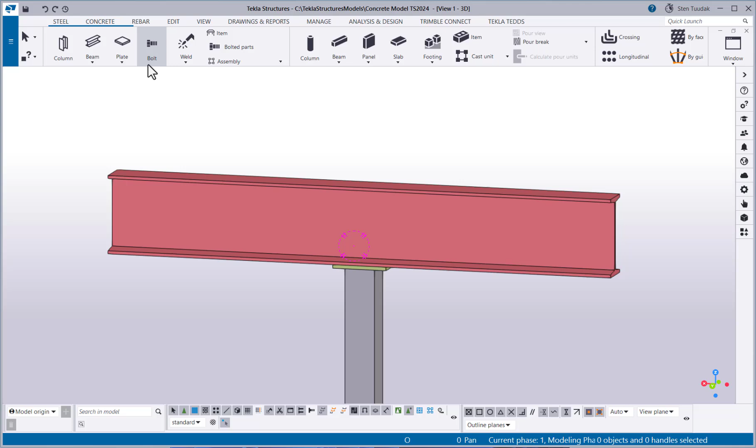One thing that I like about Tekla 2024 is the new way of adding bolts between steel parts. So if we start creating bolts like old ways, hold down the shift key to see the property pane and set the properties right.

Here you can choose the size like always. The array is important and the starting point. These are already correct, but the new thing is this contextual toolbar. What's interesting is these three options that we now have.

The first one is the bolts automatically detect the parts and the direction to be bolted and the faces, so everything is as automatic as possible. I'm glad I was in this testing group, so this is what we tested. By default it's selected, and this is what you normally want to use.

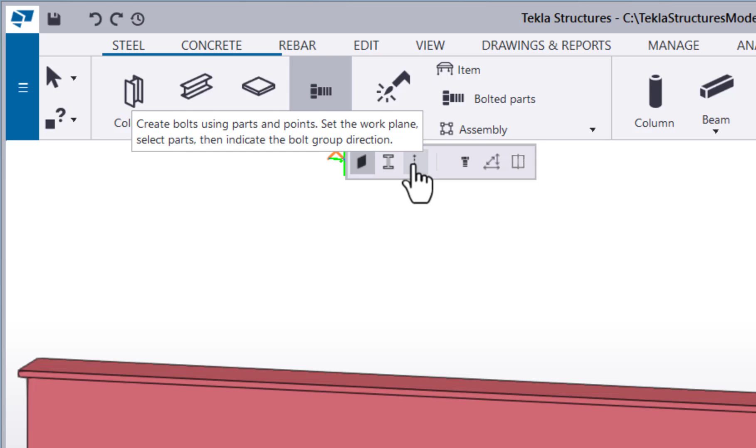The second option is we can select the parts we want to bolt manually, but the faces come automatically. In some cases maybe you want to use this one, and the old one is the third: we select manually the elements we want to bolt together and select the axis. This works right away like old times, but we want to test the new way.

As you can see, we can see the preview, and it automatically selects the middle of the part like we normally do the bolts. In the middle of the part it selects and shows the distances and shows the preview. So I like this very much.

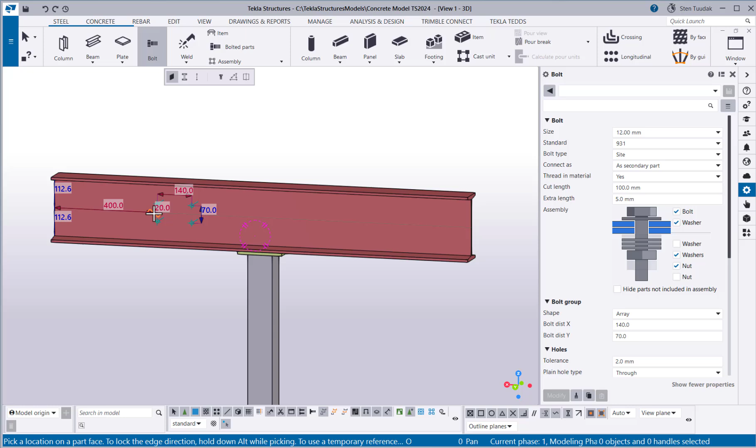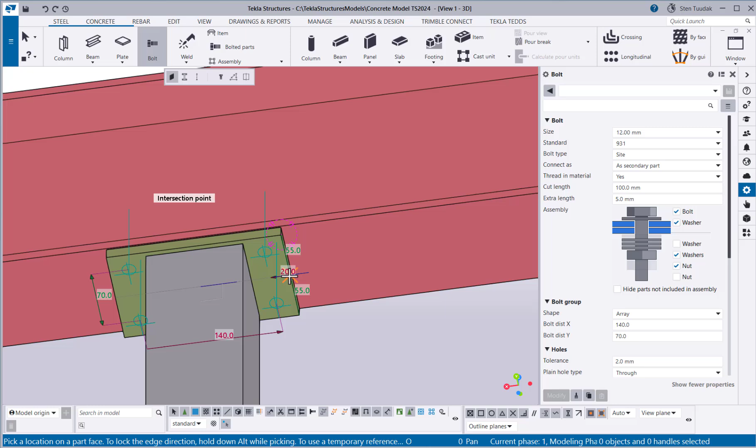For example, we need to do here. Of course you measure the distance of X and Y, and you enter here, and you can see right away the preview, and this preview is shown. It looks nice, and it selects by default the middle of the plate, like we normally do, and we enter the bolts here. So yes, we now have the bolts.

They came automatically nicely. If you want, you can select the bolts and change the numbers if you want, like always. The only way of rotation, for example, if these bolts came automatically wrong and we want the bolts to come from top to bottom with the screws fixing in the bottom.

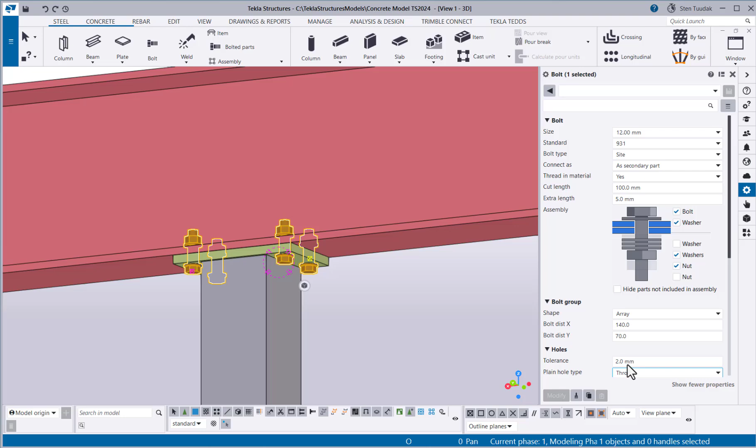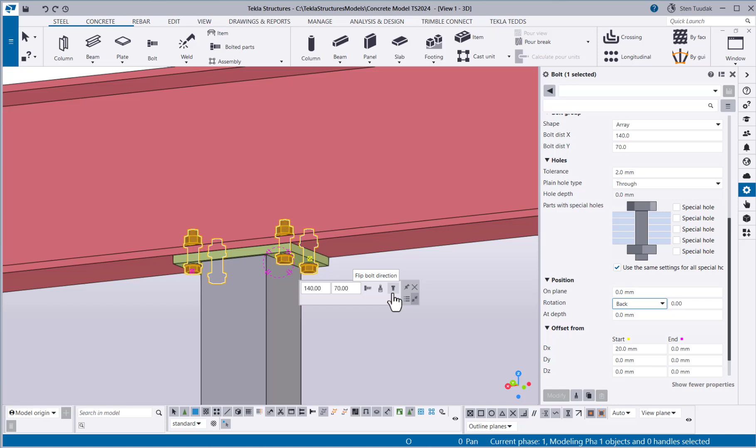In the old times there was some rotation option, back, behind, front, below, something, I never really studied them. I just rotated 180 degrees, but now in this contextual toolbar there is a 'flip bolt direction' button. This is a nice button, so we can easily flip the bolts. So adding bolts, I like it very much, and this is something new that we have now.

One new feature, really the most popular feature in the world in Tekla 2024, is more colors in drawings. First of all, to use more colors in drawings, we need to create more colors, under the file menu.

There's one new editor, and here you can see the color palette editor. So we create a new color, add a new custom color. Let's say this is yellow, very yellow, we know. Name it yellow, okay.

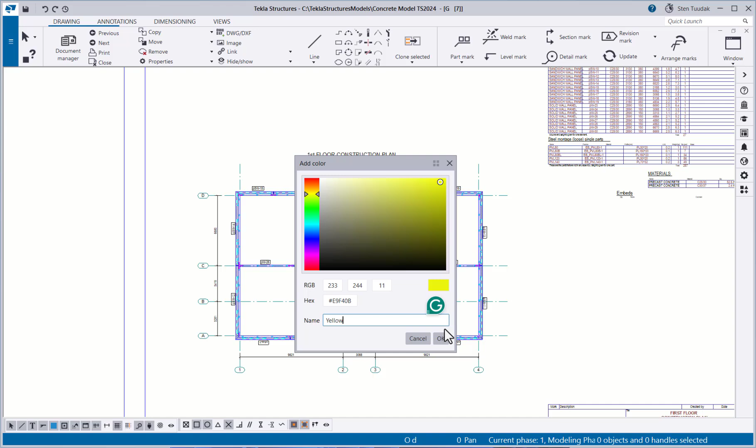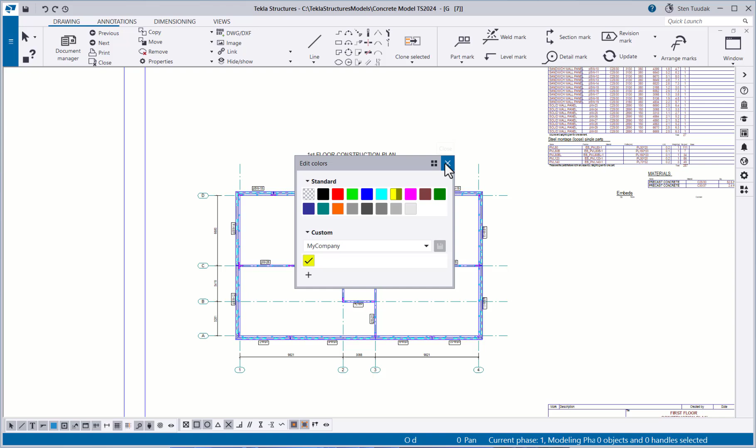And we can see here is yellow, and my company is my company, and let's save this. So yellow color, we can add more new colors, and the file name is my company. So we have created a new color. Let's close it, and see where we want to use this new color.

For example, let's take these stairs. Let's double-click on the stairs, and here you can see the colors: visible, hidden lines, and the reference lines.

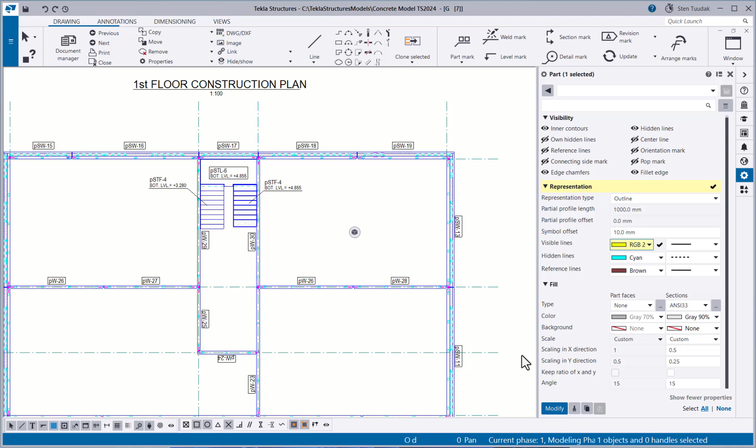We change the visible lines to yellow, and we can see 'my companies' here. You can change the file name to what you want to use, but I use my company and this yellow color right now, and click modify, and we can see that this element really changed to this RGB color. These numbers, every software uses these numbers, this is well-known, and the element went to this color.

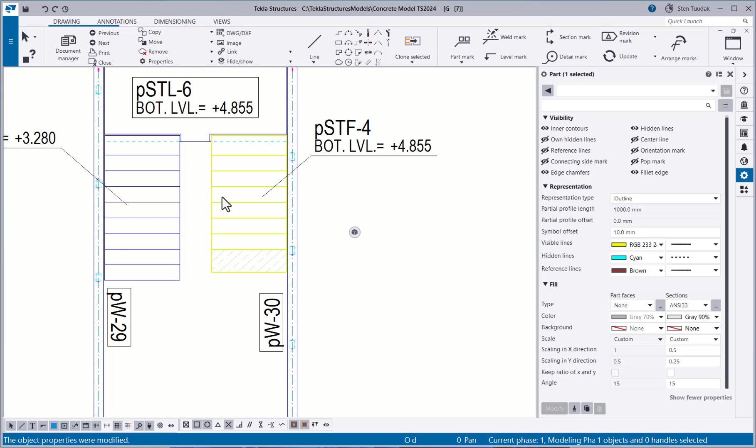And finally, when we want to print out, these settings go to the print drawings too. Let's make it black and white, and I think line properties, and...

So all new colors, I think yes, we can see here RGB yellow color and this line thickness, so we can change the line thickness here, for example 20, and we can save as, and we know that yellow corresponds to this baseline width times thickness number. This thickness is yellow color, and we can print.

So we can have as many different colors as possible in our drawings, and you can use them as you wish. So more new colors in the drawings, here you have it.

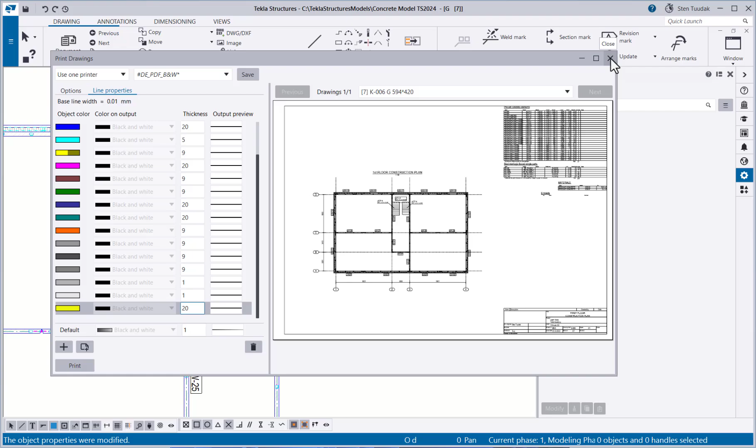In Tekla Structures 2024, I like one more small feature. I don't know how much development they spent on this, but it's very valuable and I like it very much. It's called interactive rotation center.

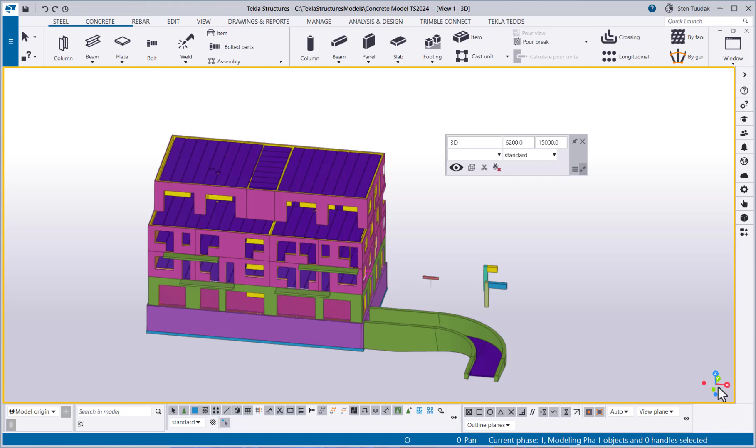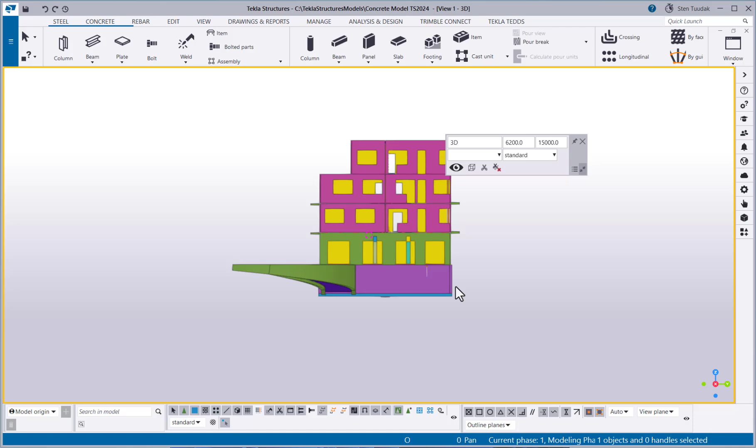In the old times, we had a contextual toolbar where you could choose which side you want to see the model. We still have this feature, but now extra we can see the axis from the bottom right corner, and you can click from here so it goes smoothly. It's very intuitive and I like it very much. I definitely will use this feature, and I recommend testing it out. Put attention here, test it out, and see if you like it and if you are going to use it. I think it's a very good and useful feature.

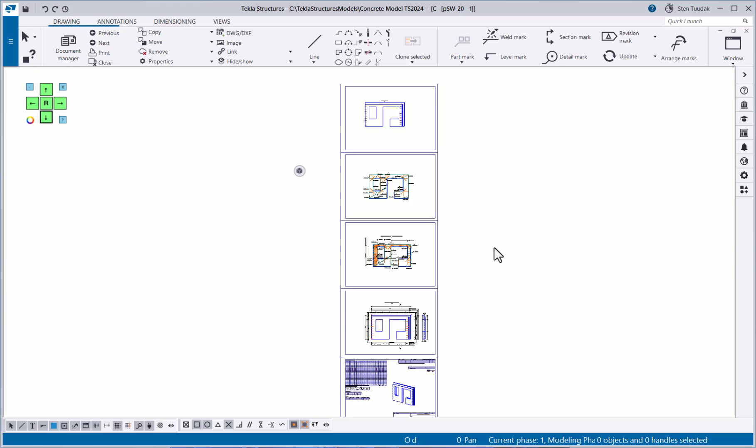One improvement I'd like to bring out, which is a bit more complicated to show and test, is that I believe Tekla or Trimble development has put a lot of effort into having better dimensions. If we create shop drawings automatically, we can have these dimensions automatically, and I like everything that is done automatically. There are some improvements there.

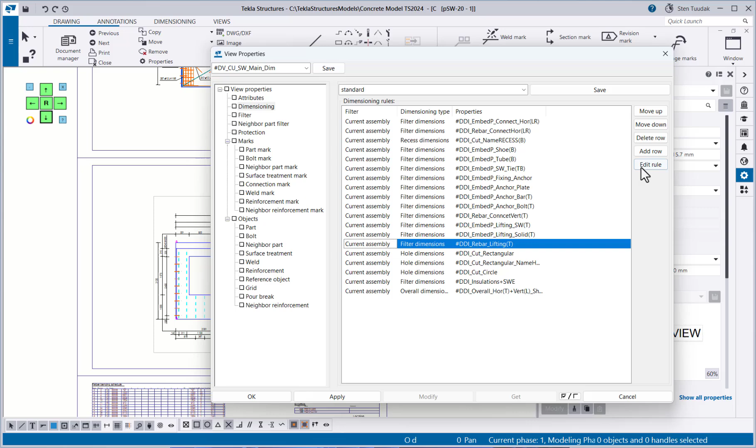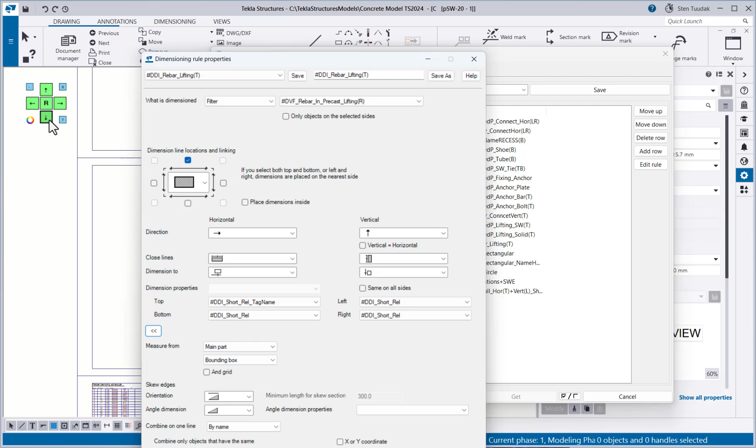For example, if we select this view and dimensions, then filter dimensions, like I use a lot, and edit rule, we can see that the dimensions are coming more nicely. If they don't fit on your screen, you can use the macro that's in Tekla Warehouse. I see many options that maybe you want to use or maybe not, but you have this opportunity.

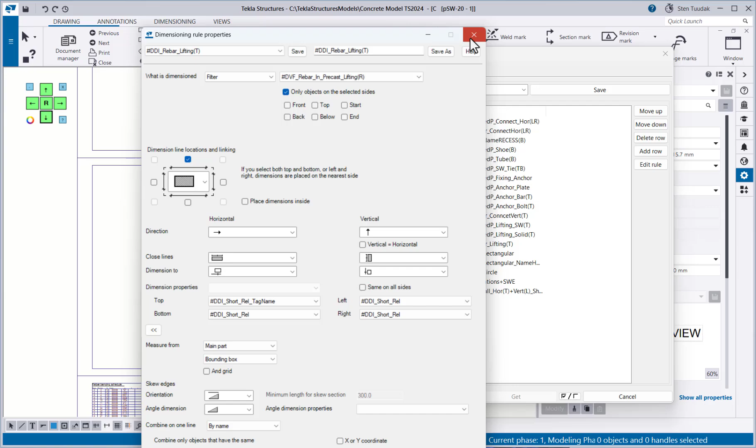But definitely the new one is 'only objects on the selected sides,' so we can turn it on and choose what side or where we want to have these dimensions. So this improvement, hopefully automatic dimensions have been improved.

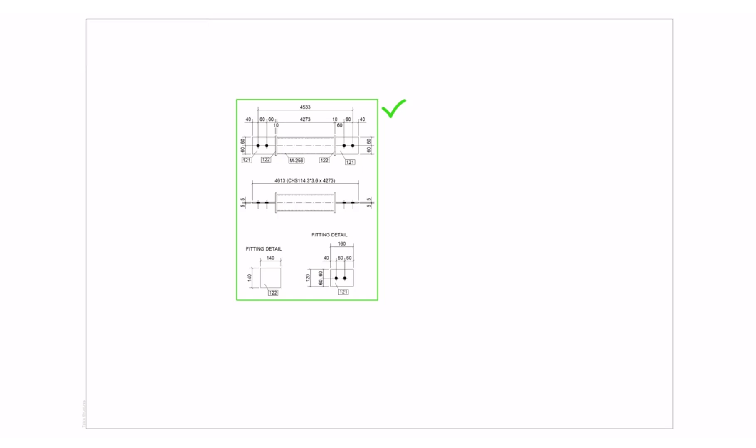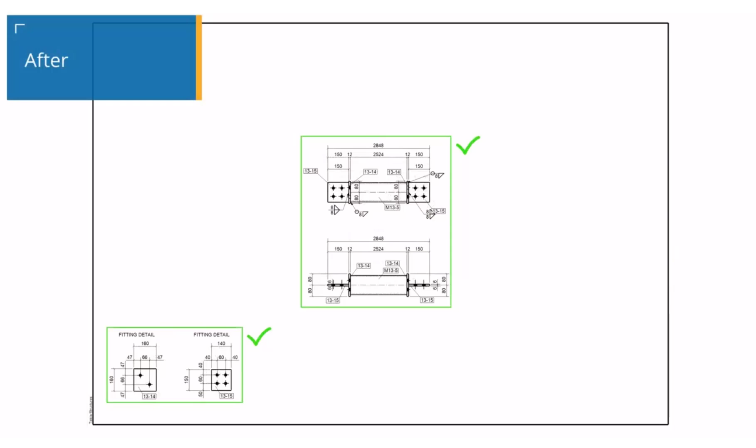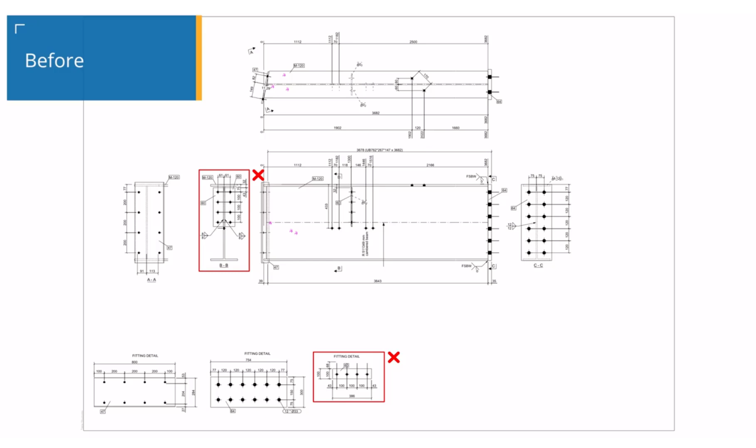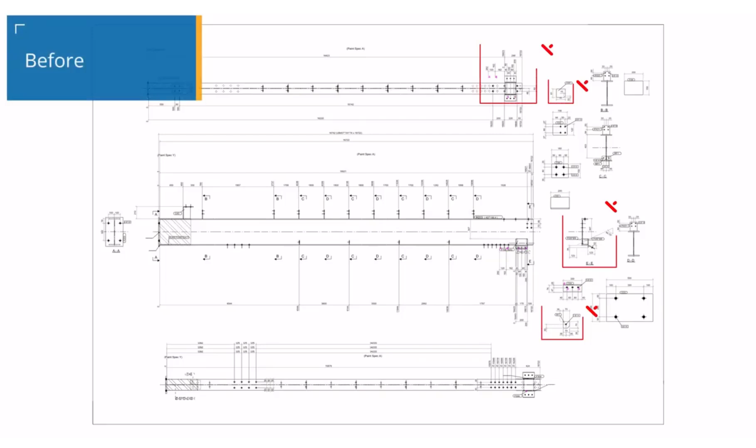The second thing is, as you know, on the first drawings we normally place the dimensions, and at some point when we know two elements are pretty similar, we use cloning in Tekla Structures. Cloning is working better now and has been improved. I'm really happy they've improved the cloning feature, and here we can see some examples of what's been improved. In the old times, cloning sometimes worked better, sometimes worse, but now it's been improved and is much better that we use in every project, or we should use it. That's why I like this improvement and development in Tekla Structures 2024 very much.

The next thing I like in this version is the new improvement, BCF Topics. It's improving collaboration with other software tremendously, especially using these BCF things with IFC files that support collaboration. I need to say that now in this version we have it in Tekla Structures too, but I think we've had it in Trimble Connect already for about a year.

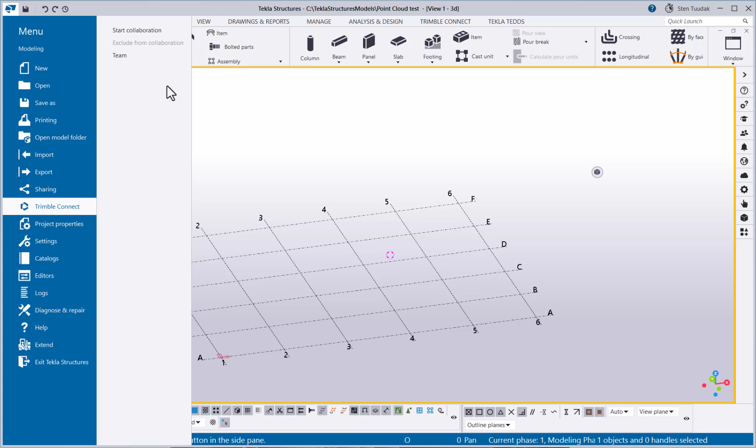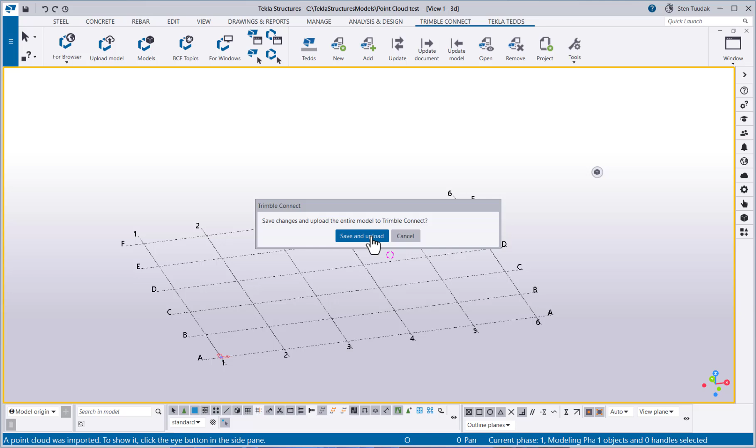To make it work, first we share this via the Trimble Connect file menu, start collaboration with Trimble Connect. So we share this point cloud test, change the server to Europe, and create it. Now we have this model in Trimble Connect, and if we go to the Trimble Connect tab, first we upload the model. We don't have anything here yet. Save and upload, and now we have this model in Trimble Connect, and I like this new BCF Topics feature that we can open from here. It's uploading successfully. Accept everything.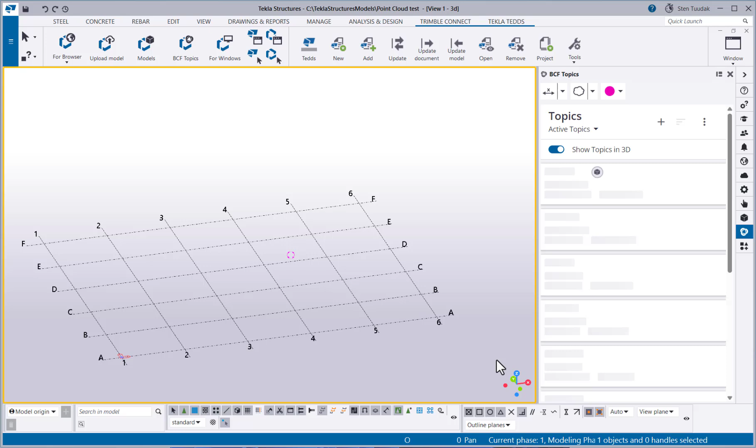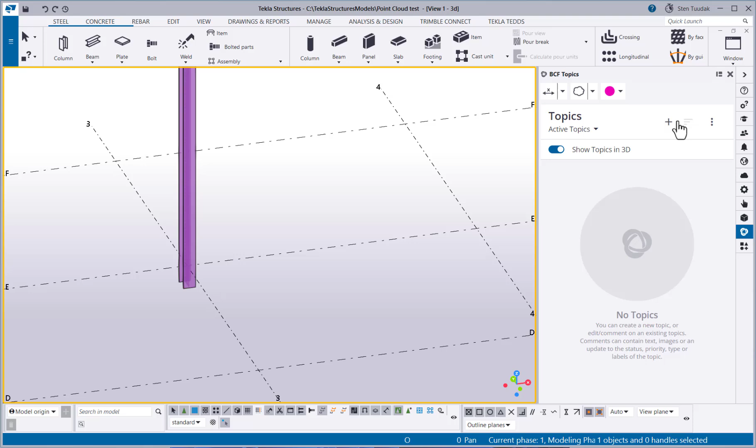It's loading. There are no topics because we just created it, but let's create a steel column, a random steel column, and add a new topic. Here you can see all the topics will come here. Add a new topic: title, something is wrong. Description, point to who we want to assign it to. For the type, we can have it as an issue, maybe, or clash, undefined. Let's put undefined. Priority normal, everything is normal in my country. Due date, tags, status: in progress.

We can also use IFC files. We can use our Tekla model shared in Trimble Connect, or we can use it with IFCs as well. If you're using IFCs, you want to add references, and then you can see the IFCs. But in this case, I will not have it. Add models, and let's make markups, a cloud markup.

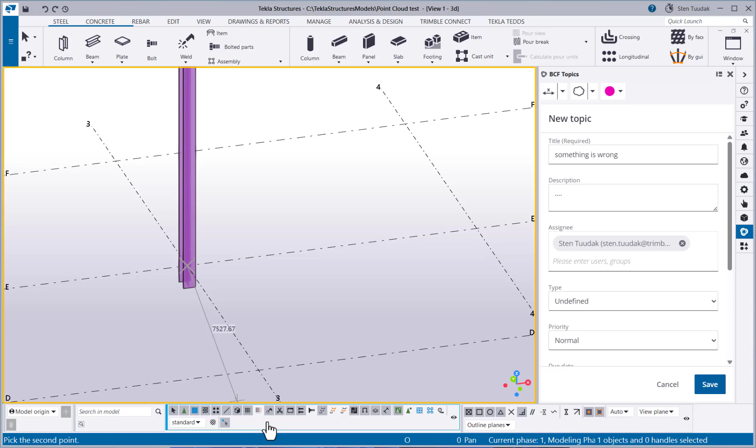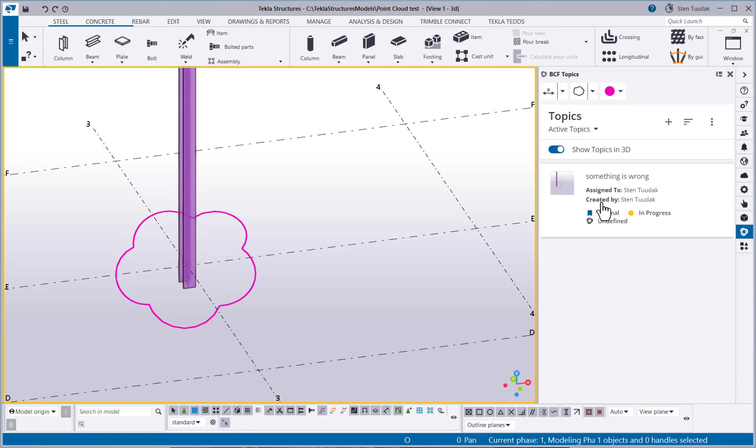It goes to Trimble Connect, and we have this 'something is wrong' topic as a new topic. We see the markup. If we reload the view, then if we are anywhere else and click on this topic, it goes near to this topic and we can view it.

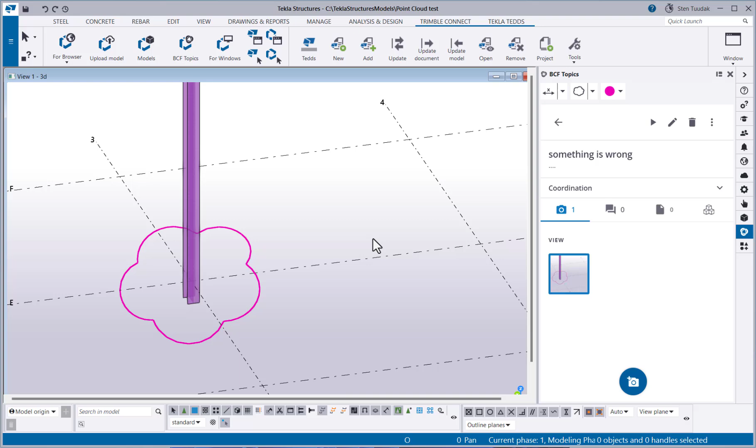It's connected to Trimble Connect, and now we want to upload the model again to Trimble Connect, save and upload. So these BCF topics have now reached Tekla Structures, and you can use BCF topics here also. I like it very much.

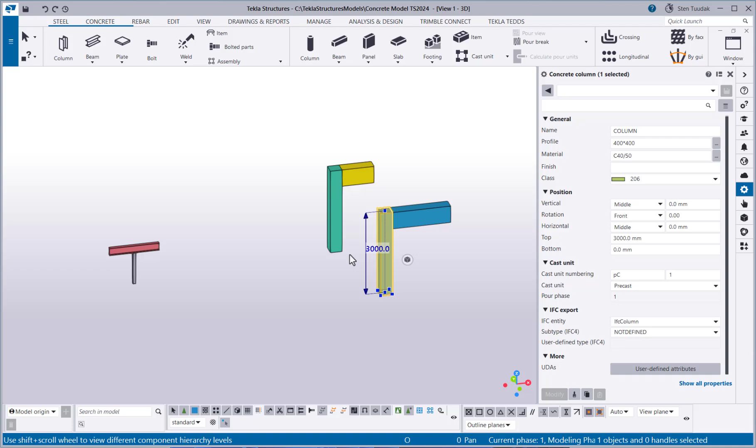The one feature I was waiting for a long time, and in Tekla 2024 I'm happy we have this improvement, is IFC export property sets. The new way it works: we have here, for example, precast, cast-in-place, and steel - three different elements.

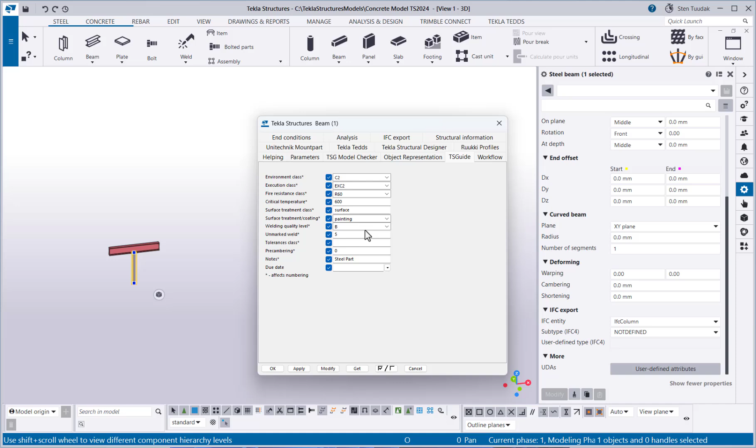I have added here user-defined attributes, for example different ones for steel part level. Now when we want to export these elements, I select the three elements, file menu, export, IFC, old IFC. It works with old and new IFC.

If we select selected objects, property sets is a new thing, and we have different property sets. If you click edit, this is what I want to show you. First of all, we can include and exclude whatever line or rule we want.

This is the file name, and here are the different rules. I think it goes from top to bottom, going through different things. So for steel assemblies, we can have these IFC entities.

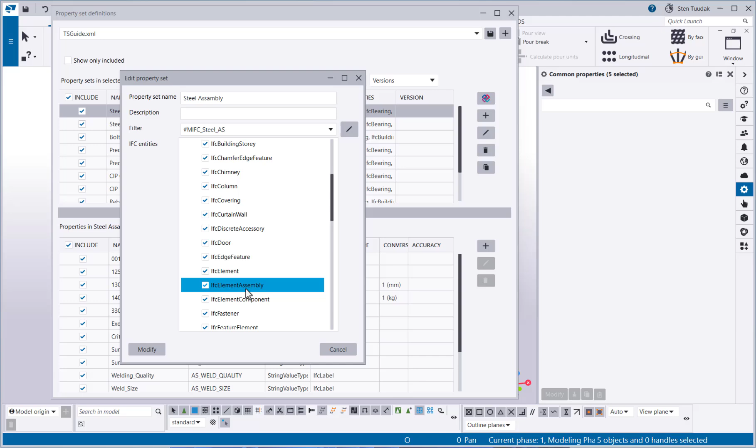If we look here under modify, we can select which IFC entities it will export with. I think assemblies, if I'm not mistaken - IFC element assemblies, this line is correct.

But once more, we can use our filter. With this one, the filter is 'model IFC export steel assembly.' So we have done our export filter that takes all assemblies that are steel.

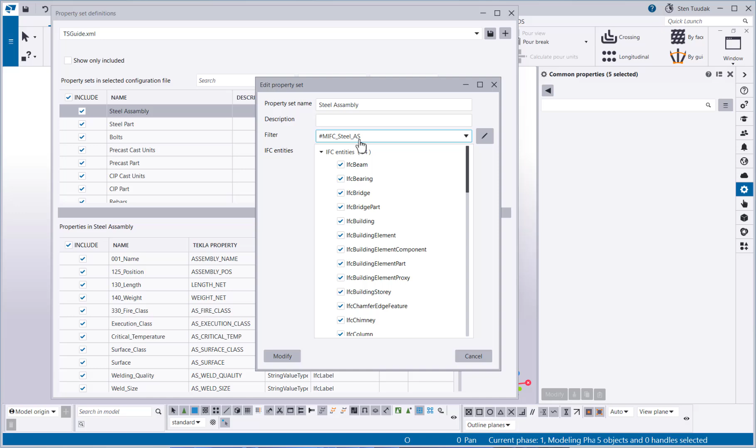So we can have steel assemblies, steel parts, with different IFC property sets. For bolts, different property sets. We can see precast unit property sets, precast part property sets, cast unit property sets, cast-in-place part property sets, and here rebars and everything else like insulation, neoprene, timber, metal is steel - but yes, we can have everything else at assembly level, at part level, so we can cover everything and have different property sets for everything.

So once you do it, create new property set, here you can see which information is included, so you can add a new one or modify an existing one.

The name including is, again, you can include or exclude anything. The name is visible to IFC users or whoever is viewing the IFC. Tekla property - this is very handy.

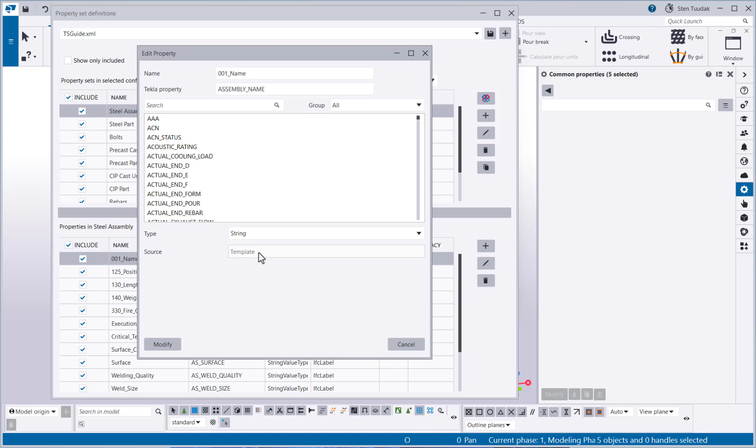If you click edit and search, you can type here as Tekla property, or you can search and it automatically tells you the type, which type it is. You can change it, whether it's a user-defined attribute or from template, and so on. You can fill it out. So yes, a lot of different opportunities now.

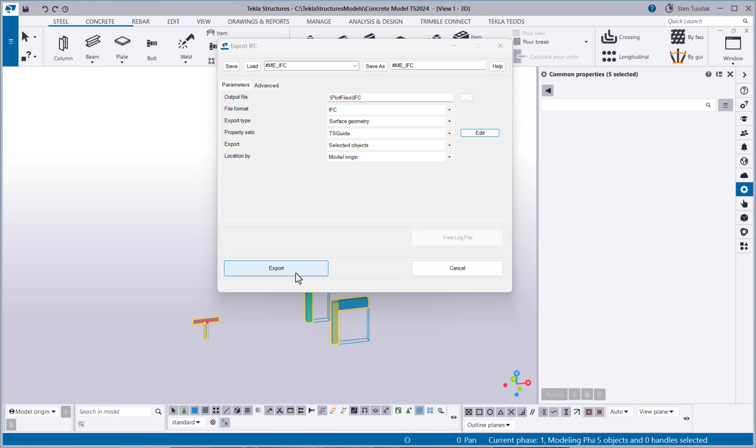Let's close this one. Yes, we selected elements - let's select just in case again. Use these properties, selected objects, and export. It went quickly - close this one and open C.

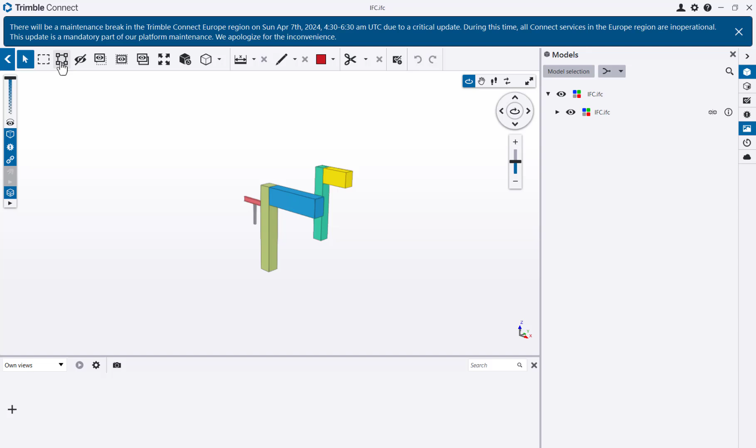Under plot files, I think it made this IFC. This is the IFC that was just created. We open it with Trimble Connect. From here you can select to view at assembly level or part level.

If we look, for example, at the concrete column IFC, let's double click here. For the concrete column, we don't have much information, but something we have - precast part, name, profile, material, we have it here.

For the steel part, we can select the steel element, and this information is added to IFC - we can see steel assembly, steel part. Here you can see these are the IFC information I put together, and here I put the notes for steel part - everything is included here.

If I switch to assembly level, let's select the same column and other assemblies, and we can see the assembly level information. There's something missing - most probably I did something wrong, but something has come through to assembly level also.

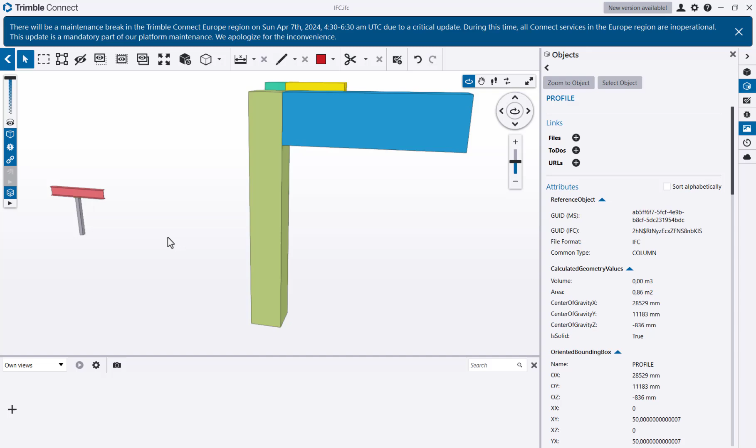So I'll investigate, but anyway, it's a big step forward that we can export IFCs with different levels - part level, assembly level - and different materials, like concrete or steel columns having different property sets, with as many rules as we like. So I liked it very much, and I hope you like it too.